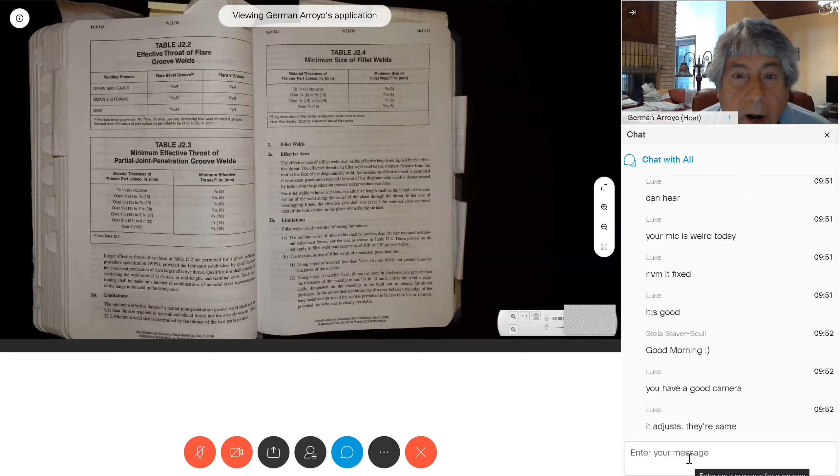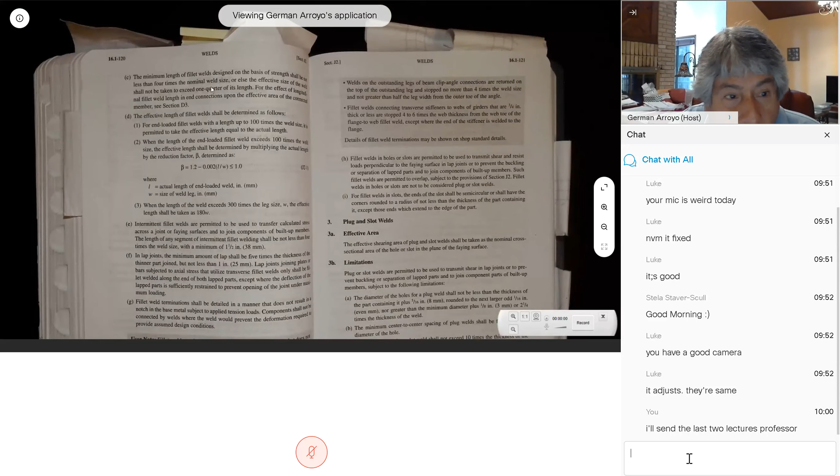I want to take care of business before I continue. Yesterday we were talking about the limitations, and some people after class were still asking me the same question. Don't forget that on page 16.1-119 and 120, we had a limitation. The one we were talking about yesterday, about the minimum length of the weld, is given at the top of page 16.1-120.

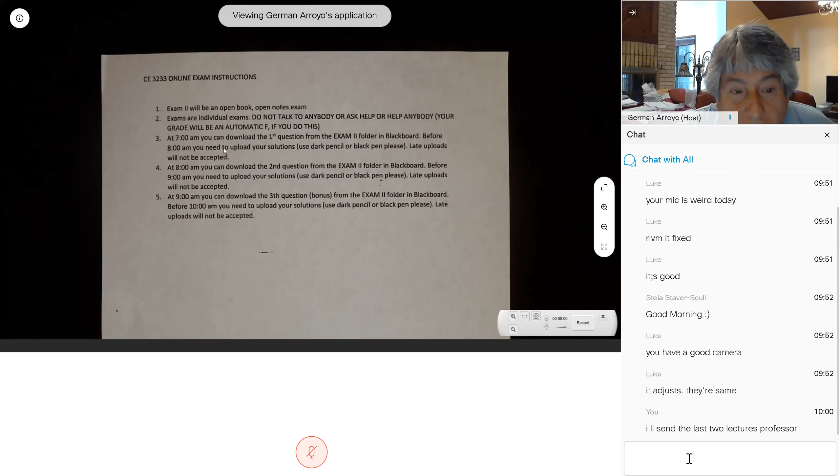Want to remind you, this is important: next week the exam is on Tuesday. We're going to start at 7 o'clock in the morning. Just imagine right now we have 35 people, and just imagine that you're late. So you have to start at 7 o'clock. I know that parking at your house is difficult or whatever, but you need to be there at 7 o'clock, and you have 1 hour to upload your exam.

It's better to get partial credit than not to get any credit at all. So the first problem, by 8 o'clock you have to upload it. The second problem you can download at 8 o'clock, but also on this screen, the second problem will appear for 1 hour, and by 9 o'clock you need to upload it.

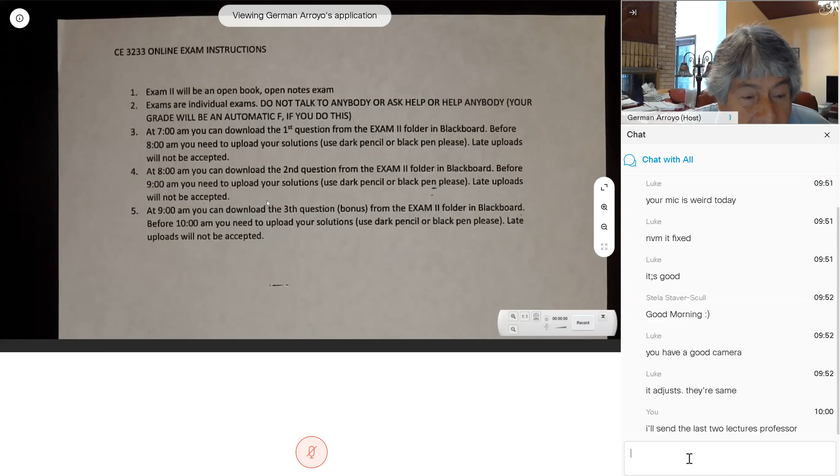So you need to start practicing scanning, but make sure that I can read your exam. The same happens with the bonus. I already put this in Blackboard: the bonus you have from 9 until 10. Make sure you understand that at 10 o'clock no more exam will be accepted. So it's better to get partial credit than no credit at all.

Any question before I start solving problems? Will we get partial credit for the third question?

You're going to be getting partial credit for the first question, partial credit for the second question, and partial credit for the third question. Remember what I told you in the face-to-face lecture, that the only reason why some people go to the next level is because of the partial credit. So definitely you're going to be getting partial credit, but like I said, it's better to get partial credit than no credit at all. Make sure that you upload your exam. These are the rules, very simple rules, so make sure that you follow the rules.

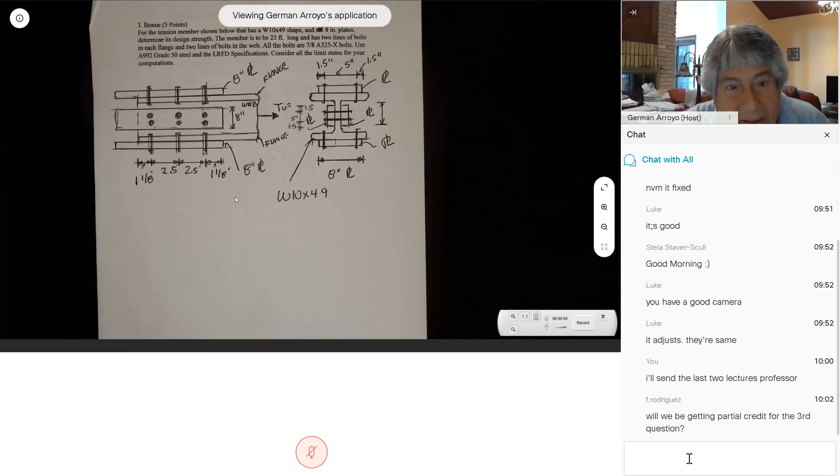You had good memory, this is the same problem that we solved yesterday. This is exactly the same shape, the W10 by 49, and these are exactly the four plates that we had yesterday. The only difference is that instead of being a welded connection, this is a bolted connection. The question here, it is a tension member, so you don't have to worry about determining if it's eccentric shear. It is a tension, and the shape is given.

And there are four plates, two in the web, two in the flange, and they want to find the design strength. Remember, phi T sub n is greater than or equal to T sub u. Also remember it is a 25-footer, so you have to check the K, the L over R.

It says here two lines of bolts in each flange. So when you look at the flanges, this is one line of bolts, this is the other line, and each line has three bolts. So on the top flange, in the top line, there are one and two lines, and each line has three bolts. How many bolts do we have in the top flange? Six. Six on the top flange.

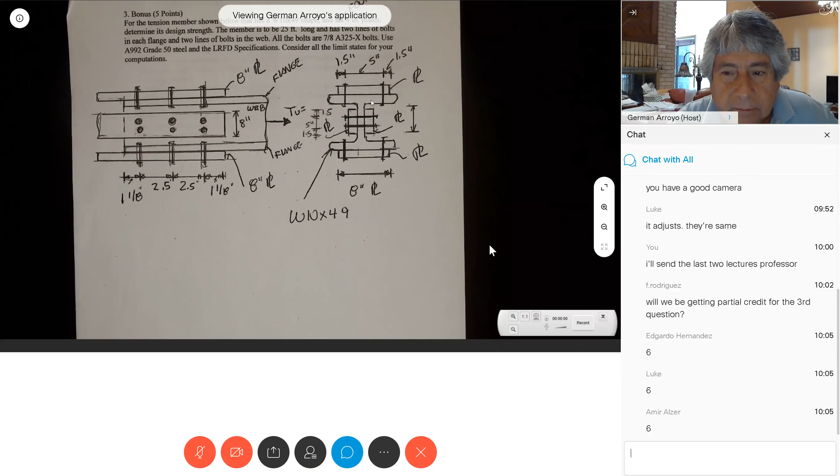The second question for everybody: is this single or double shear? Single shear. Good, so on the top flange and the bottom flange, we have single shear. On the web, we had this is one, two, three bolts, and we had two lines of bolts. So how many bolts do we have in the web?

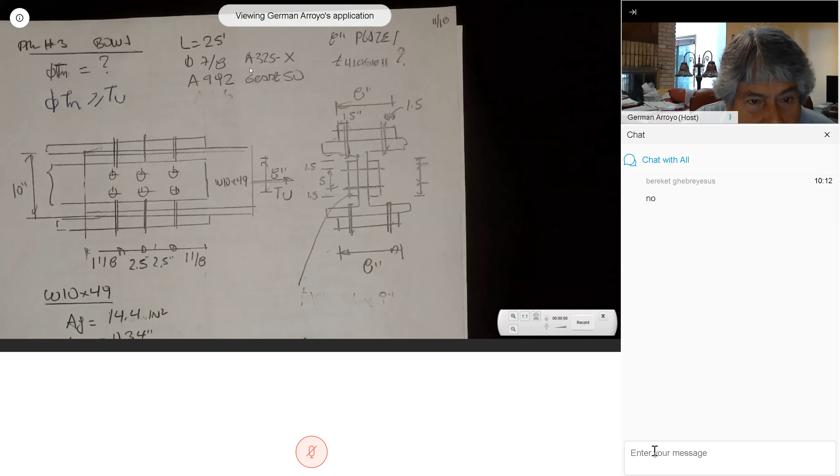The length of the member is 25 feet. The bolt is 7/8 inch, A325X, the material is A992 grade 50, 8 inches. And I put the thickness here to ask you the question already asked.

From chapter 1, the gross area - the same gross area that we used yesterday. The thickness of the web is 0.34, the thickness of the flange is 0.56. For a wide flange, the thickness of the flange is always more than the thickness of the web. The reason is we want a large concentration of area away from the neutral axis, because the moment of inertia is the moment of inertia about its own centroidal axis plus the area times distance squared. So we want a large moment of inertia, that's why we want a large area - that's why the flange thickness for a wide flange is always more than the thickness of the web.

And r_y was 2.5, and the required was L times 12 over 300. For tension, we do not use the K factor. For compression, we use the K factor. So it's okay.

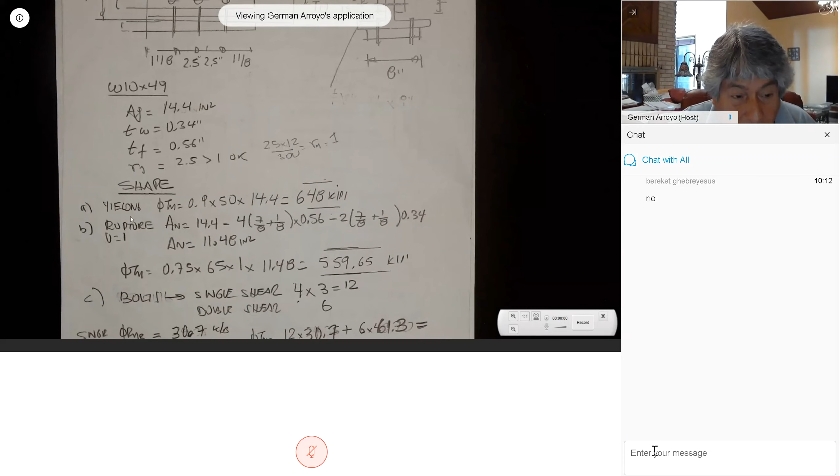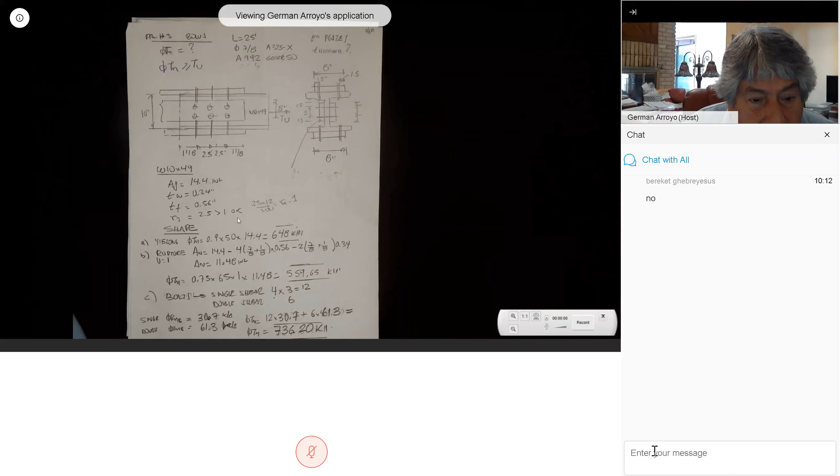Making a point here - I only have information on the shape. Since this is tension, I had to check all the limit states, because the problem says consider all the limit states. Remember, for tension we have tension yielding, tension rupture, bearing, capacity of the bolt in single or double shear, and block shear.

So there are 5 limit states, and I started with the first one: yielding. It's phi times Fy times the gross area - look, the gross area is right here. So if yielding were to control, 648 kips is the design strength of this connection.

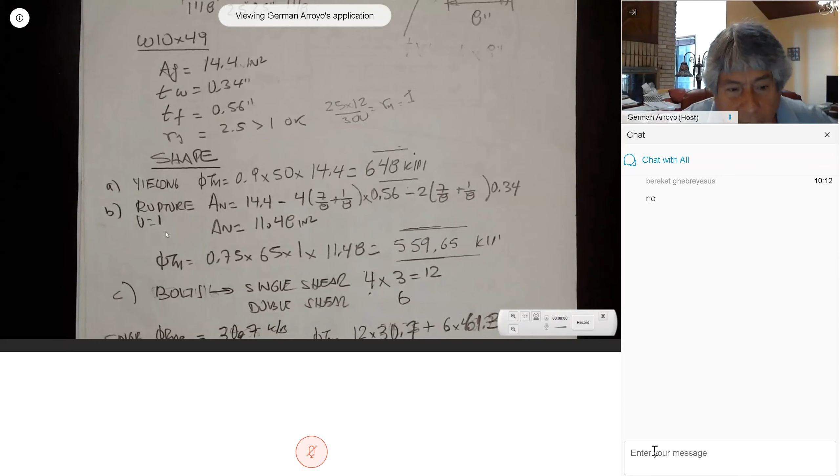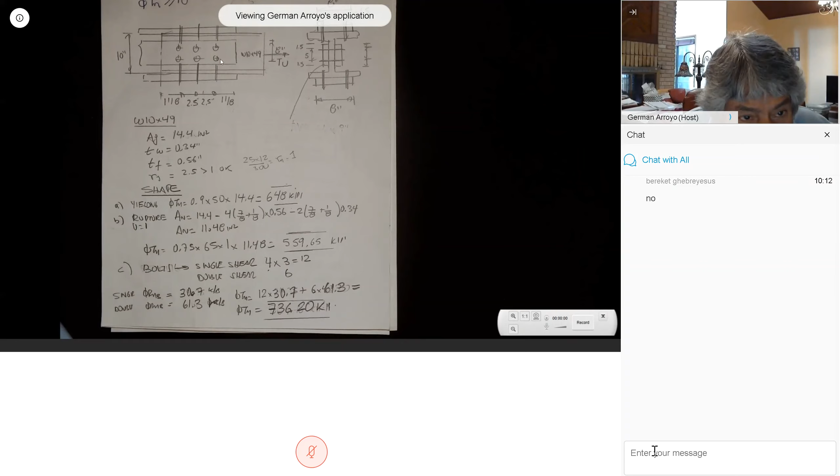Look - whenever we have tension, this is the load. This section is perpendicular to the direction of the load. Look at this section perpendicular to the direction of the load - we have the flanges and the web. So this cross section at this location is this one.

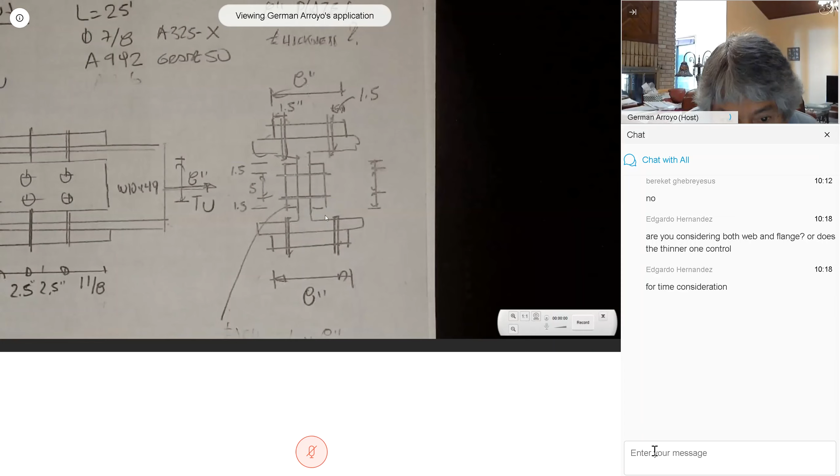Edgardo, look - physically at this location, this is the cross section. So at this location we have four holes in the flange, and this is the thickness of the flange. Whenever we subtract from the total gross area, we're going to subtract the 4 holes that are in the flange. So this is the thickness of the flange, and the thickness of the flange is more than the thickness of the web.

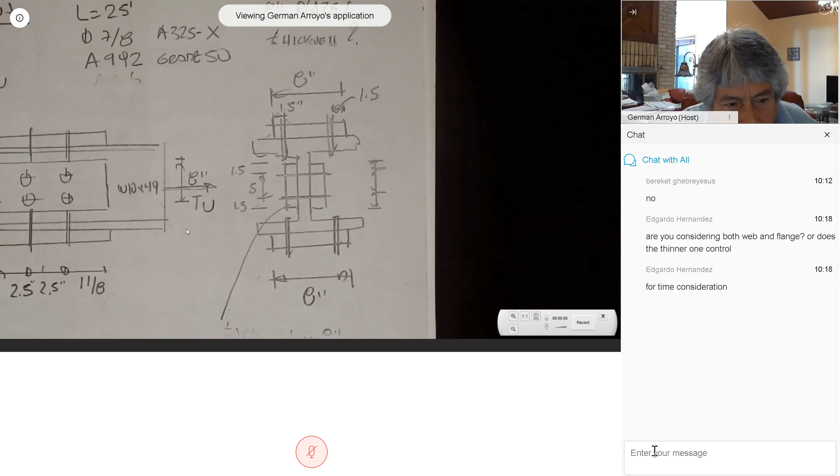Whenever we go to the web, we're going to subtract 2 holes, and this is the thickness of the web. So we do not just use the thinner or the thicker - we consider what is physically there. So at this section we have 4 holes in the flange, 2 in the web. So I'm going to go back to this.

Thickness of the web and the thickness of the flange - so if you look here, gross area 14.4 minus 4 holes in the flange. Diameter of the bolt plus 1/8 inch, 0.56 is the thickness of the flange, minus the 2 holes that are in the web - 2 times the diameter plus 1/8 inch, 0.34 is the thickness of the web. So the net area was 11.48.

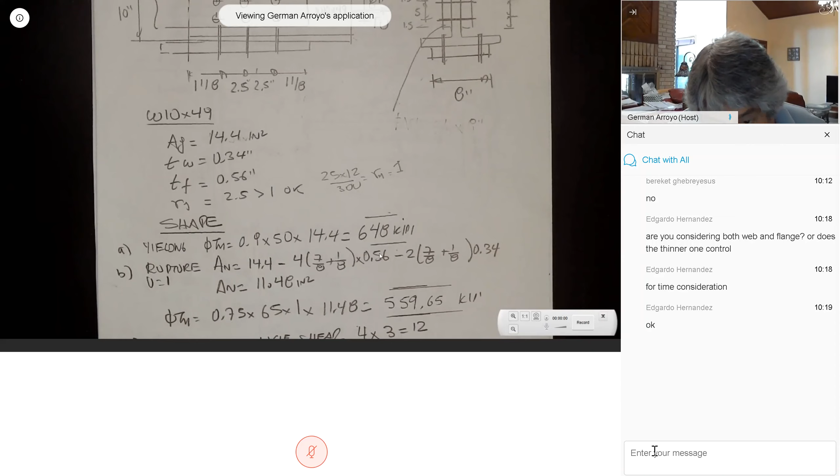Whenever something happens in a class, I don't blame you, I blame me. I understand that probably I didn't cover this correctly, so when I grade, I consider that it's not your fault, it's my fault. But in this case, I'm telling you in detail, if I give you something like this and you make a mistake, it is your fault.

Any question about this? Look, 4 in the flange, 2 in the web. Any question, any clarification? This is like in the class, some of you understand faster than others. So if you still don't understand and don't want to ask right now, ask me later, and I'll turn my computer on and show this to you in detail.

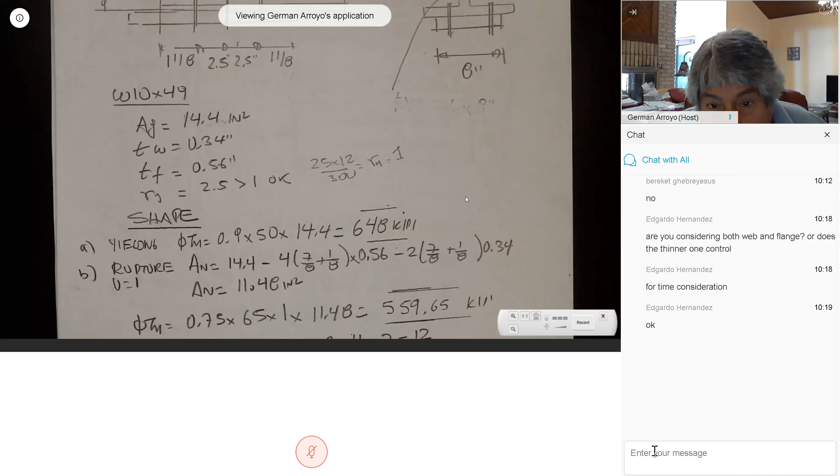The point I want to make is whenever you look at this tension member and this section, when we had 100% of the load like we normally do, we had 4 holes in the flange and only 2 holes in the web. That's why the net area had 4 holes in the flange, 2 holes in the web, 11.48.

So the limit state of rupture, phi times Fu, the reduction factor U is 1 times, so this is the net effective area, 559.65. Right now this is controlling my design because it's smaller than this. So right now what is controlling my design is rupture. The next limit state is the bolts.

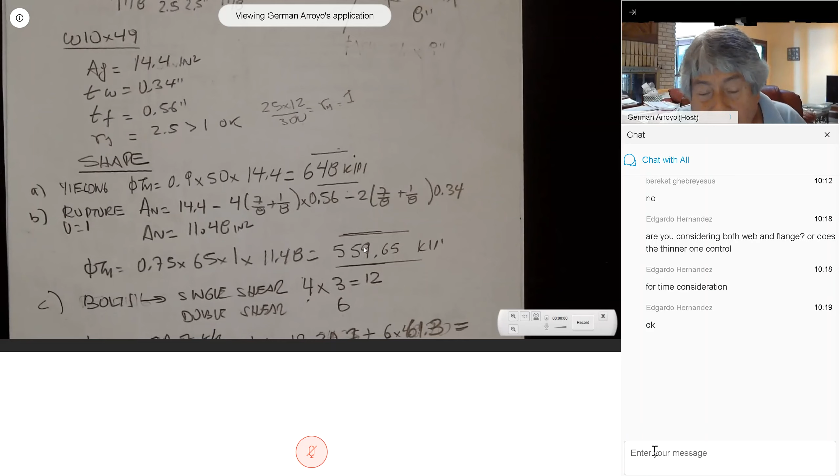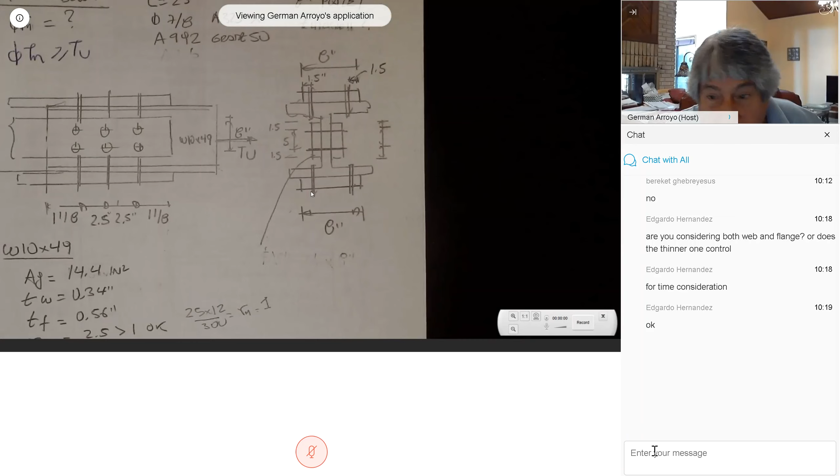I'm going to go back to the top and ask you this question. I don't know what Edgardo means for time consideration, maybe I'll figure that out later. No time consideration. If you're saying that you're going to consider the thinner one, that's the time consideration - that is a mistake, that is a terrible mistake.

So if you consider it here, all of them with 0.34, that is a terrible mistake. Nothing to do with the time, it had to do with understanding of the problem. And I think that's where you...

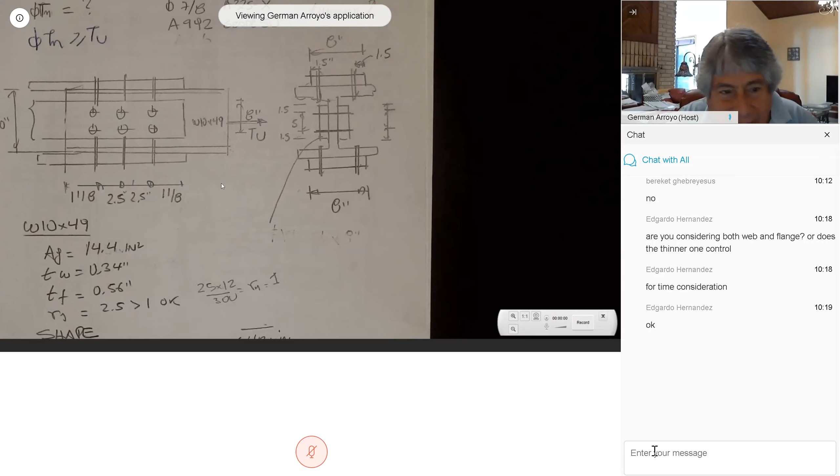Okay, so we're looking at the board right now, and I asked you this question before. You have to be looking at this cross section. Before I ask you, single shear and double shear - whenever we find what is the design strength of the connection based on the bolts, how many bolts do we have in single shear? Anybody? How many bolts are in single shear?

Not for the cross section, for the entire - whenever we find the design strength based on the number of bolts, look, there are two in here, two in here, two in here, so we have 6 and 6, 12 - that is correct. How many bolts do we have in double shear? 3 and 3. Make sure that you look at this because that's the correct answer. Single shear 12, double shear 6 - that's what you told me, and that is the correct answer.

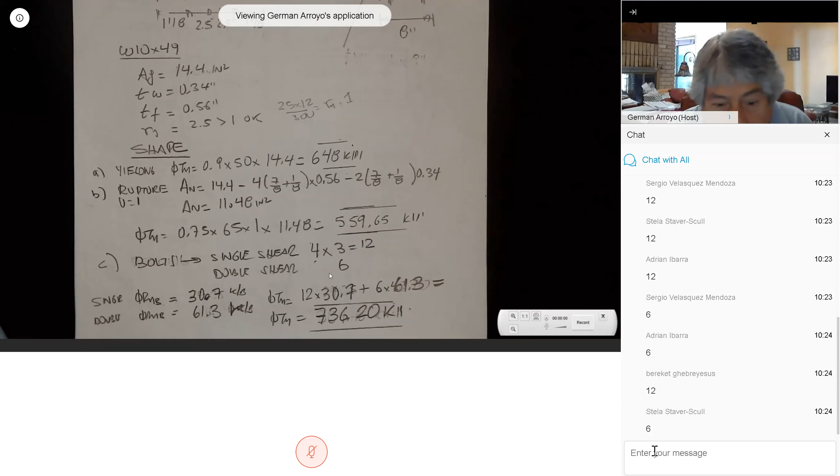Since this is exam number 2, I told you you can go to chapter 7, table 7-1, and I expect you to do that because time is very important. I want to point out something - look, this comes from chapter 7, table 7-1 for single and double shear. What I want to point out is that in previous editions of the code, this value was different. This value has increased, those values have increased.

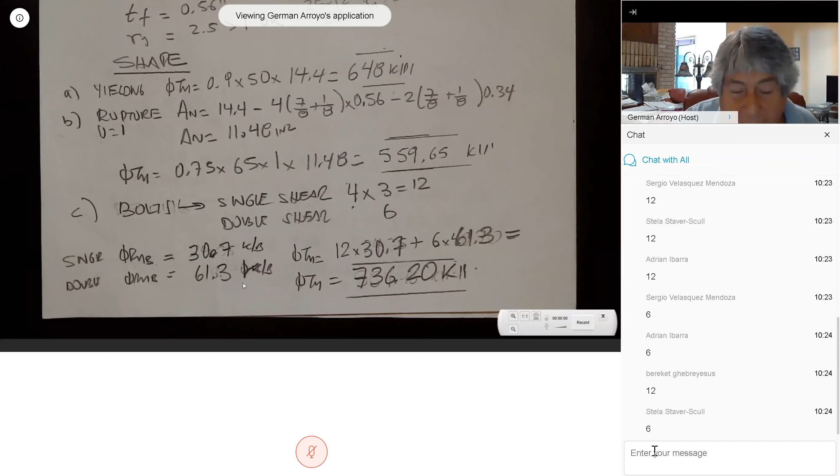So in some old exams - somebody asked me yesterday and I forgot to mention to everybody - it's not that it's wrong, it's that we had different values. Every time they do research and determine there's more strength than we believe, or that it didn't have that much capacity, they revise it and create new numbers. So this comes from 7-1, and these are the new numbers for single double shear. So we had in single shear 12 times 30.7, in double shear 6 times 61.3.

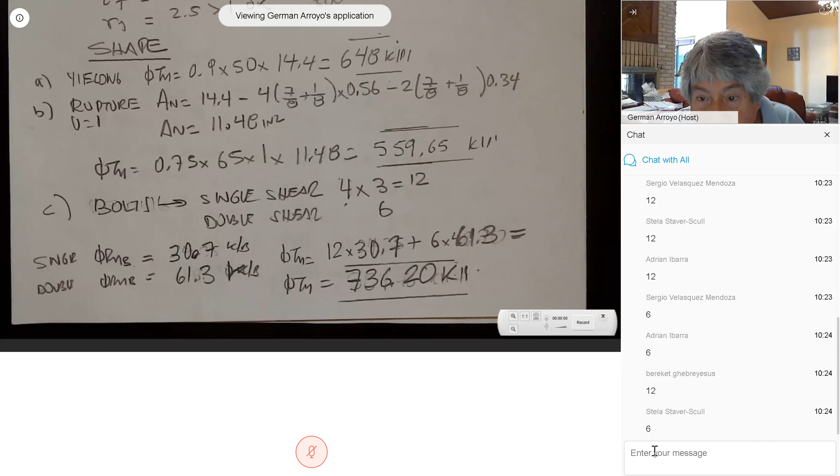So the capacity of this connection based on the number of bolts - I need to move this a little bit - the capacity of this connection based on number of bolts is 736.20. So what is controlling my design right now? What is the design strength if I end the problem here? Rupture. And how many kips is that? 559.

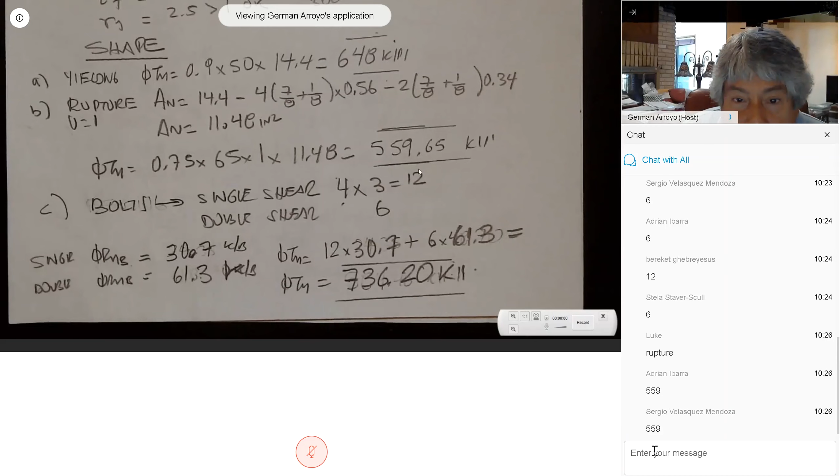So now we need to do either block shear or bearing, and what I did in the next step is bearing. So I'm going to go to the top again and ask you some questions. These dimensions are given, let's look at the top.

Can I do the bearing in the plate? Can I do bearing of this plate? I just want to find out if you're paying attention. Can I do bearing for this plate? No, because we don't know the type of material, we don't know the thickness, so we cannot do it. So I have to do bearing only on this flange.

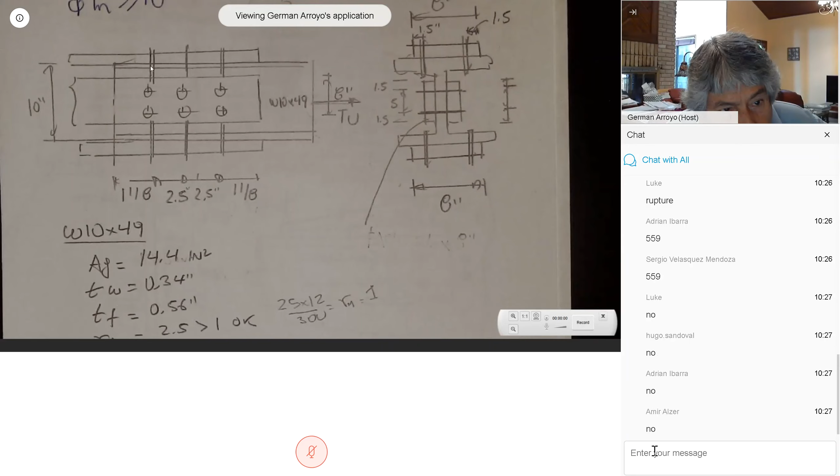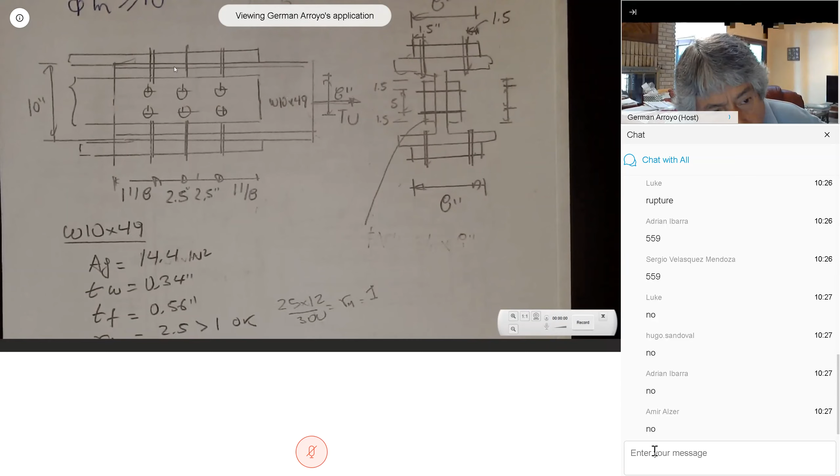So for this flange, this is my external bolt and these are my internal bolts. Look at this beam - when you look at this beam in here, this is the end, this is the end of my girder. So this in here is external, and these are the internal. So I'm going to have to do the Lc exterior and interior for the flanges. In the flanges, considering top and bottom flange, how many exterior bolts do I have for bearing?

Let me tell you, look, this is my cross section. If you go back and look in here, look at this cross section, and imagine that it is one, because all of them are the same. How many bolts do I have here on the top? And how many do I have in the bottom? So altogether, there are 4 still.

What about the interior in the flange? How many do I have interior, top and bottom flange?

Good. Okay, so let's look now at the web. This is the exterior, and this is the interior. In the web, how many exterior bolts do I have? 2. And how many interior?

And the thickness of the flange, as you know, is different than the thickness of the web. So everything that you're telling me right now is given to you, so you do have to be careful.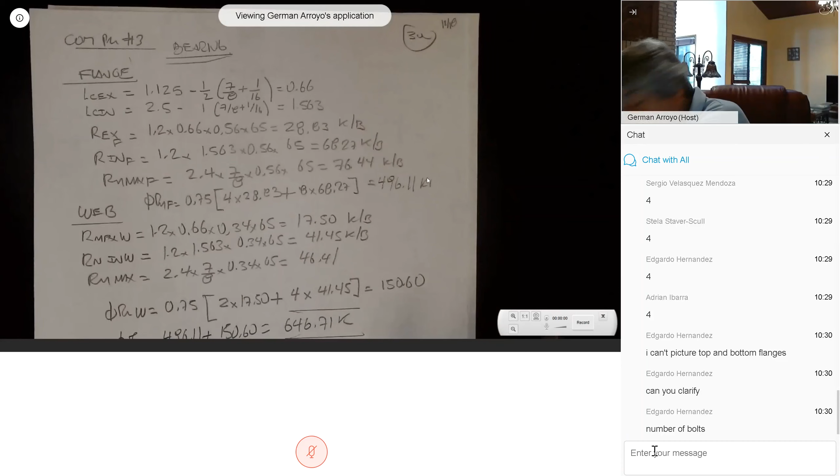So I'm going to go to the next page. I'm going to do the flange. And remember, 1 hour to solve this.

Can you clarify number of bolts? Sure.

Yeah, I know it's difficult, you do need to pay attention. I'm going to repeat this. All that I have is time. I know that you have to go to another class at 11, and you have to drive across the campus, but I had time and nothing to do. I'm bored here at home.

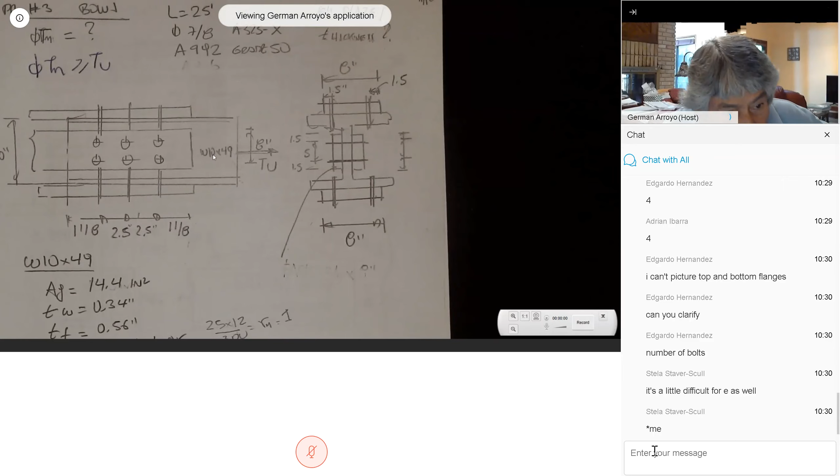So I'm going to tell you again, we're doing bearing. Whenever we do bearing, we have to consider the plate or the shape of both. But in here, there's no information on the plate, so the only thing that we can do is look at the shape, at the type of 10 by 49. And this is the end of my beam, because I'm using the plate to transfer the load to the other side.

Whenever I look at the flange, this is my external bolt, and these are internal bolts. The same here at the bottom, exactly the same. This is my external, those are internal.

So we need to know how many bolts I have at the outside and how many bolts I had inside, because in order to find the bearing strength, we're going to multiply the number of bolts outside or exterior, and we're going to add the capacity of the interior.

So this cross section applies to any location. This cross section is typical cross section. So whenever we look at this cross section, imagine this cross section is in here. And we look at how many bolts we have here at the top. We had 2 bolts. We had here at the bottom, we had also 2 bolts.

So this exterior for bearing, we had 2 plus 2, 4 bolts. Whenever we had what remains is all of this. At each section here, we had 2 at the top, 2 at the bottom, 2 at the top, 2 at the bottom. So if I tell you that exterior for the flanges only, we had 4 bolts. For the flanges only, how many bolts do we have altogether?

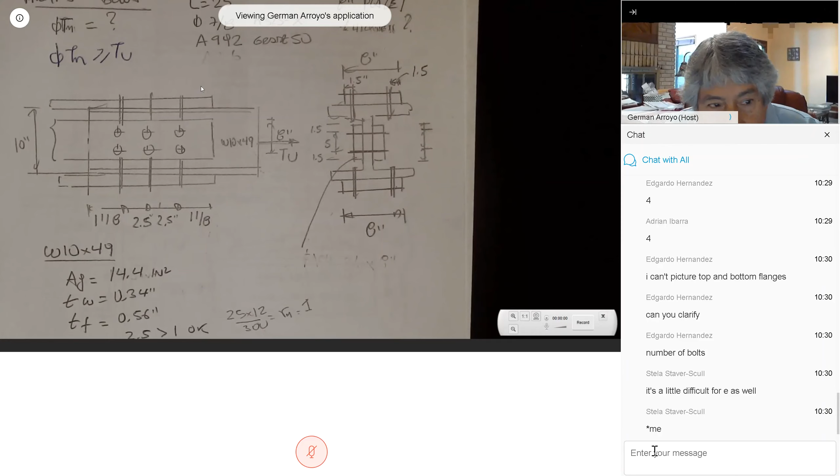No, I'm saying look, here, these are exterior bolts. Exterior bolt, we have 1, 2, 3, 4. Interior bolt.

How many do I have at this section interior? You look at this section. How many do I have interior just for the flange? How many at the top? How many at the bottom? So how many do I have here and how many here? 4. And how many here and how many here? So altogether, how many do I have interior bolt? 8.

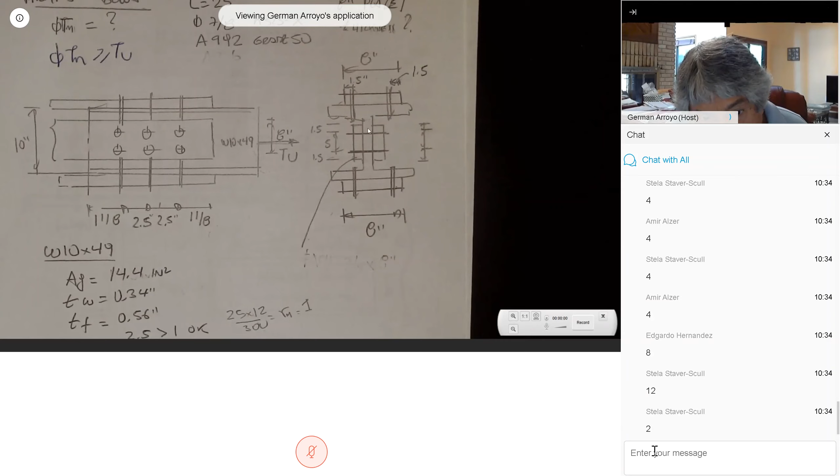Okay, so now we're going to look at the web only. The web is easier to look. These are exterior. How many exterior bolts do I have? And this is the web, this is the cross section for the web. How many do I have in here too? And how many do I have in here? 4. Okay, so that's the way we do it.

I know that is difficult. Just look at this section. This section is the typical. So based on what I think that you all understand.

And this is the geometry that cannot be changed. 1 and 1/8, 1 and 1/8, 2.5, this cannot change. It's like the previous exam where some of you change what was already fixed, what we call typical. This is here my typical cross section.

So what we have in here, flange and web. So I'm going to go to the flange.

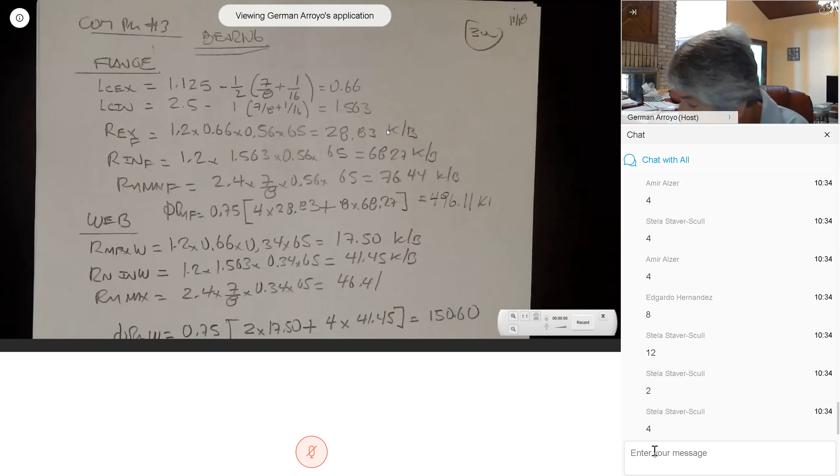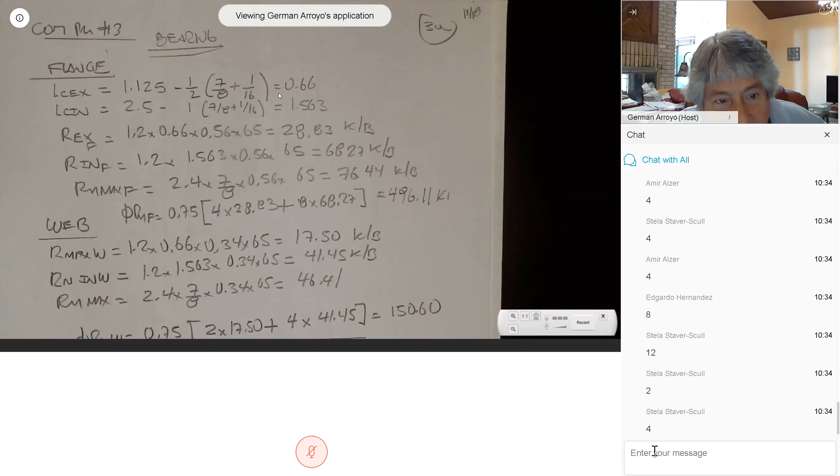So this is a length, 1 and 1/8 minus half a hole. This is the only time we use 1/16. This is 0.66. For the interior...

The distance center to center of the holes is 2.5. We have to subtract 1 hole. That's why we have 2.5 minus 1 hole, and the 1 hole is the diameter of the bolt plus 1/16.

So now, as you remember, this is tearing. And the second equation is the bearing deformation of the hole. In the previous code, we did not have it divided into tearing and deformation of the hole, everything was together. Now what I'm doing here, this is tearing, this is for the exterior, and this is for the interior. This formula is in the code, in the bearing portion. I don't want to offend anybody.

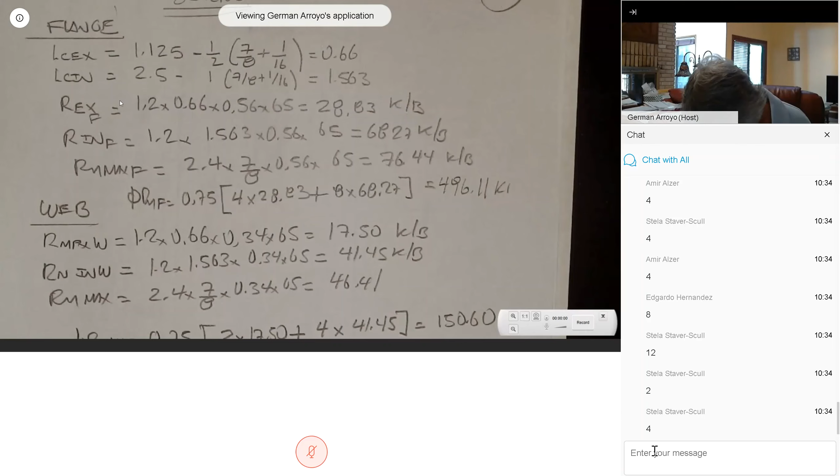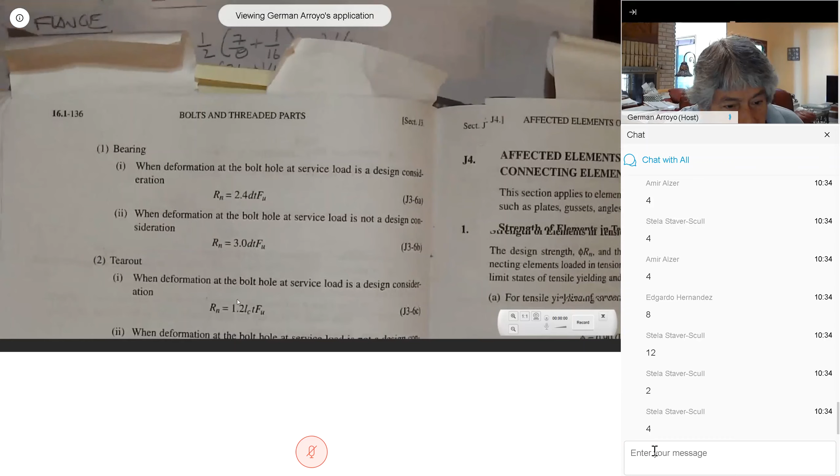But I just want you to refresh your memory because it's been a long time. Bearing deformation of the hole: 2.4 D T Fu. And in here, tear out: 1.2 Lc T Fu. So these are the equations I'm using here.

1.2, 0.66. What is this? 0.56? Times 65. I'm going to go back to the page.

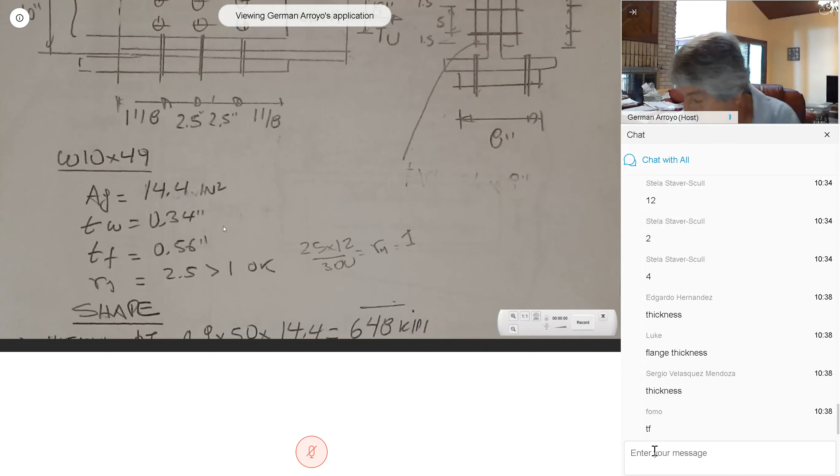The thickness of the flange and the thickness of the web. I hope you're not getting dizzy with me doing this and going back. So since I'm doing the flange, this is the thickness of the flange. This thing here is Fu.

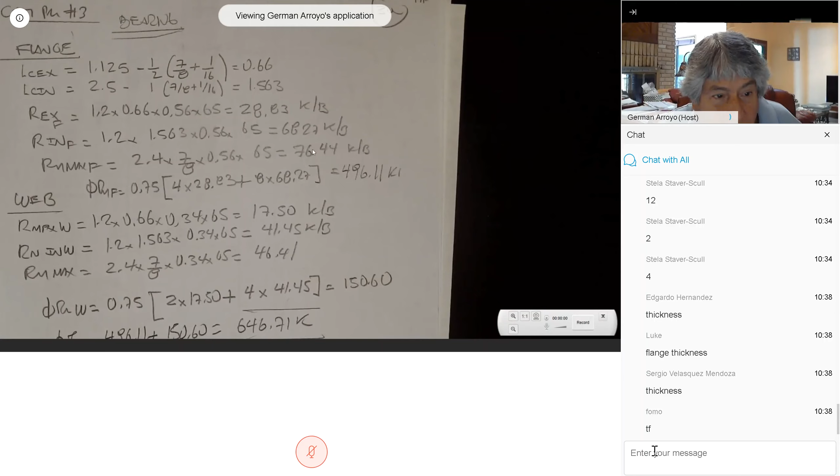So 6827 for the exterior, 3644 for the... 2883 for the exterior, 6827 for the interior, and the deformation of the hole, 2.4, the diameter of the bolt, the thickness of the flange times 7644.

We always compare the numbers. This had to be smaller than this number. This had to be smaller than this number. So in here, I'm finding the capacity based only on the flanges.

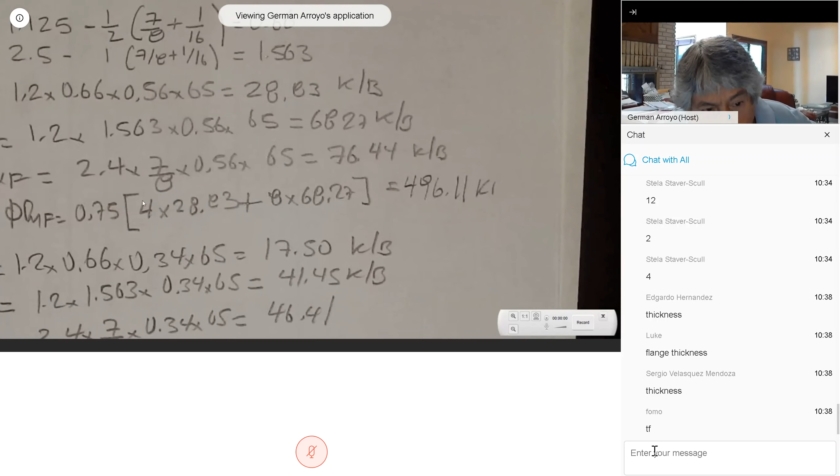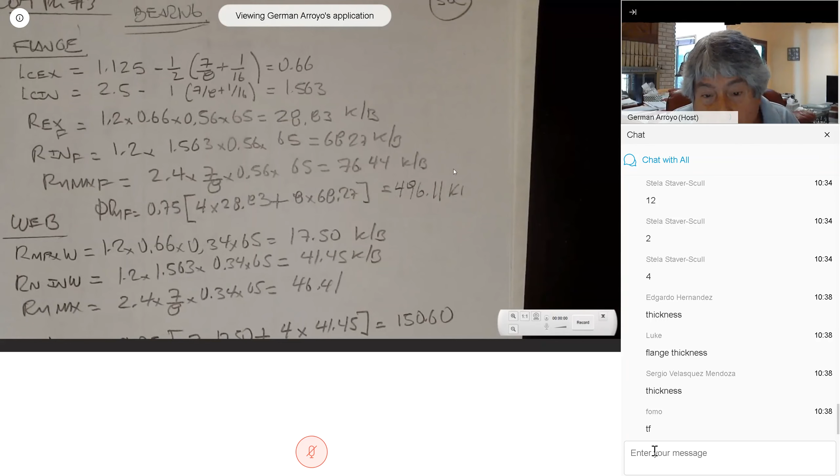The flanges: 4 exterior bolts that you told me at 2883, 4 exterior holes, 2883 times 4, 8 interior at 6827 because it is smaller. So right now, the flange alone, based on bearing, had a capacity of 496.11 K. Any question before I continue?

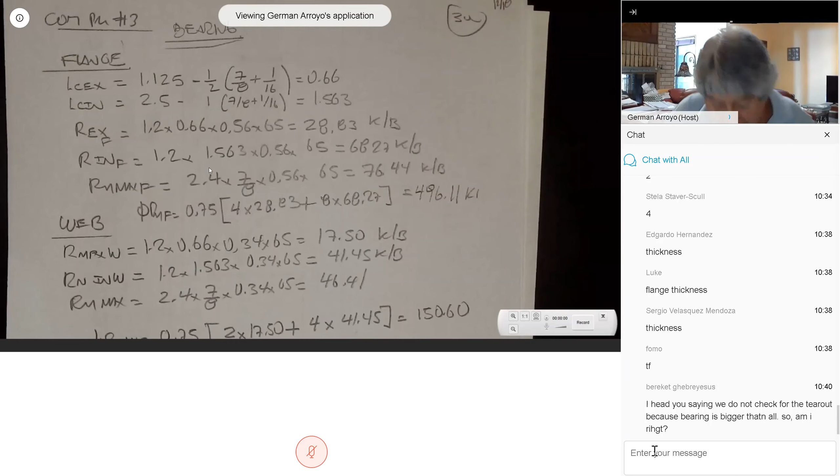You say we do not check for the tearout because bearing is bigger? No, what I'm saying is that the code always requires this in here. This equation, 1.2, this is tearout. And this in here, the deformation of the hole. I think you need to hear better, or maybe I need to be clearer in what I'm saying, is that the code - and it's not me, it's the code - look, bearing and tearout, bearing you have to check.

Oh, it was a spring break. No, you're drinking too much or something. No, I did not say that.

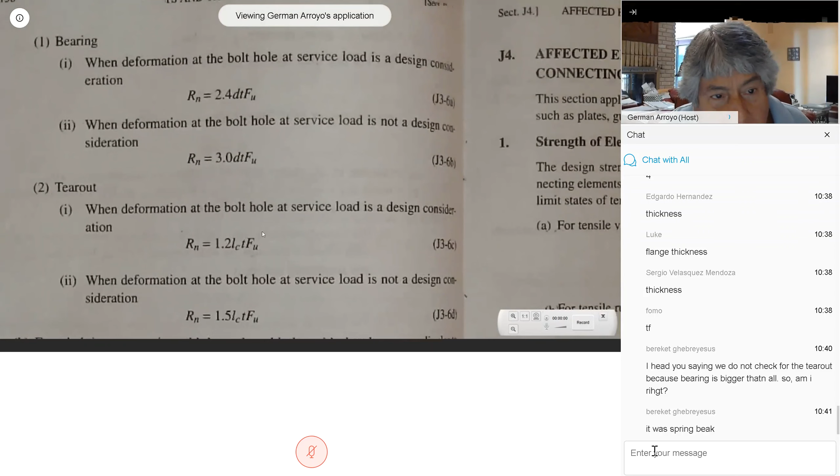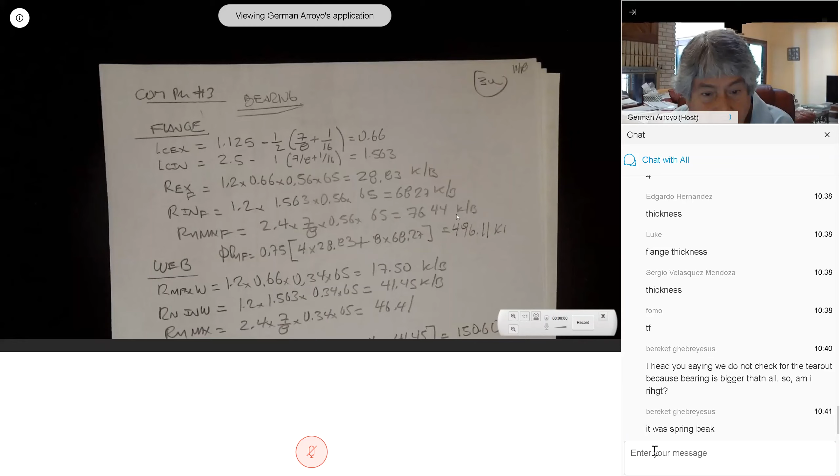Look, always the deformation of the hole, 2.4 D T Fu, is the maximum value. So you have to compare the tearout value with that value, nothing can be larger than this value. So we always had to do tearout, and we had to do the deformation of the hole. It happens in here that for the exterior it's smaller, for the interior it's smaller, that's why we're using those values. But nothing can be larger than this value. So based on the flange, bearing on the flange, we have 496.11. Any other question?

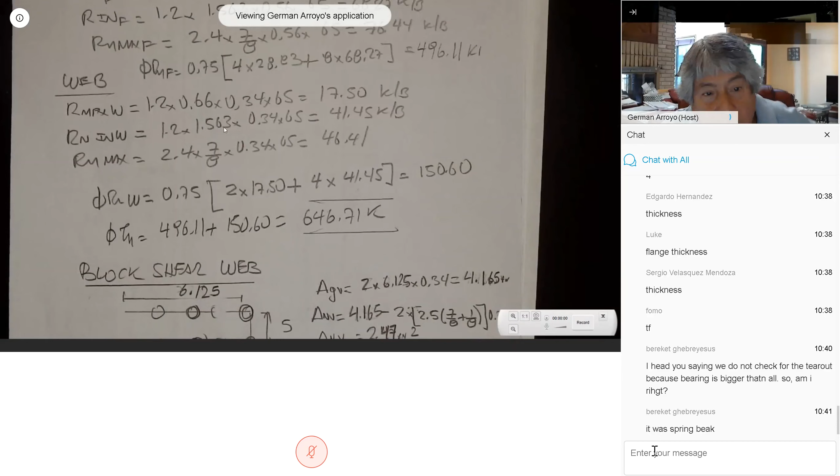So now I need to do bearing in the web. And that's why in here I call it the web. It happens that L to C exterior and L to C interior are the same for the flanges and the web, so this value 0.66 and 1.563 are the same as before. The only thing that changes is value 0.34. What is this 0.34? Thickness of the web.

So based on this computation, tearing is 17.50 for the exterior and 41.4 for the interior. Deformation of the hole, using 0.34, gives 46.41. So if we compare 17.5 with 46.41, this controls. 41.45 with this, still controls.

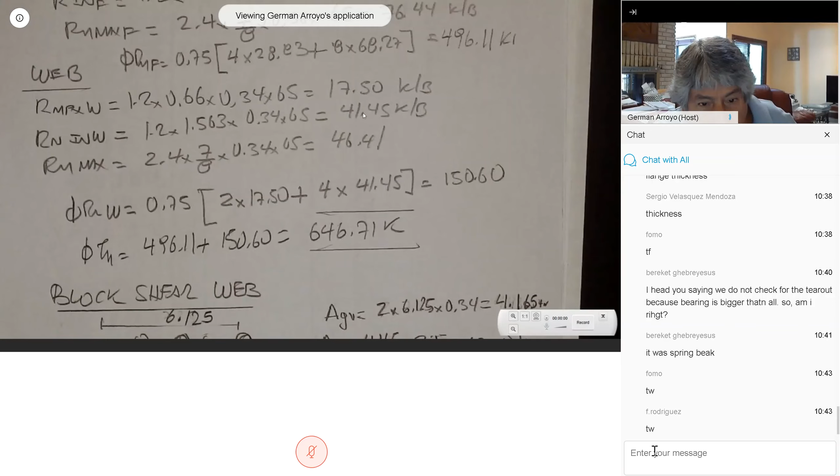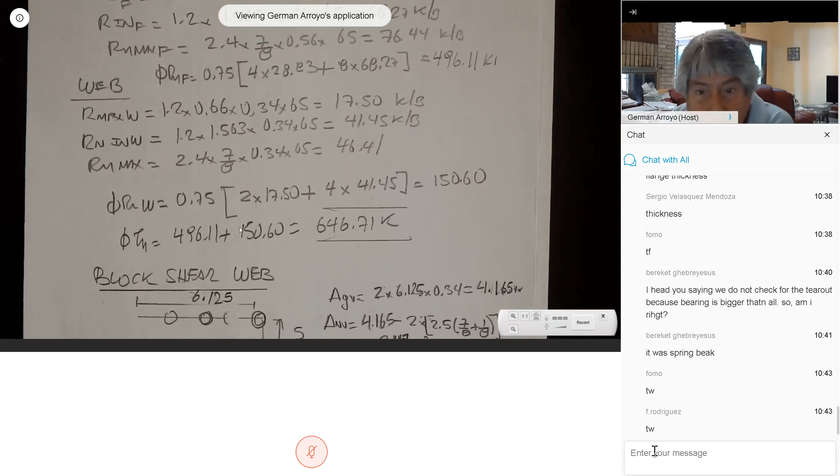So in here, I did phi times 2 exterior plus 4 interior. 2 exterior, 4 interior. And this is what I've done in here: 2 exterior, 4 interior, gives me 150.60 only. And adding, look at this value in here, the value of the flanges and the value of the web, I add them in here.

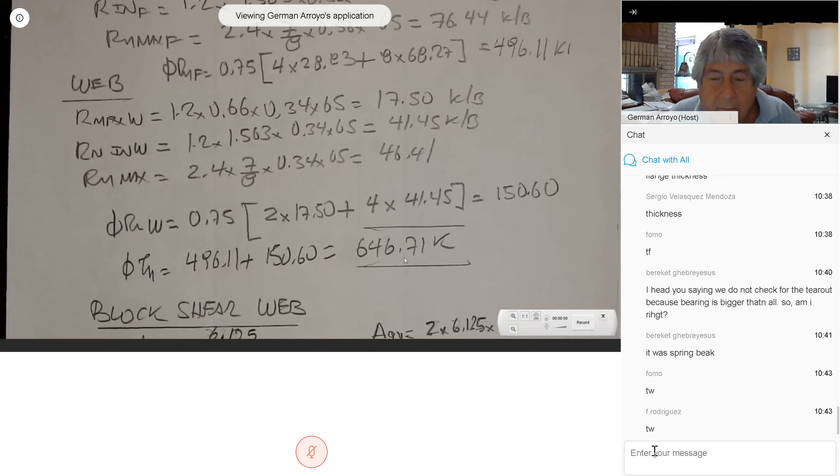So based on bearing, 646.71. What is controlling my design so far? We had yielding, rupture of bolt, and bearing, rupture of steel. So the last step is to do the block shear.

And for the block shear, the web - look, like we did yesterday - this portion in here is connected to the web. So the only thing that's going to have is going to be also a double L. And this distance in here has to be determined.

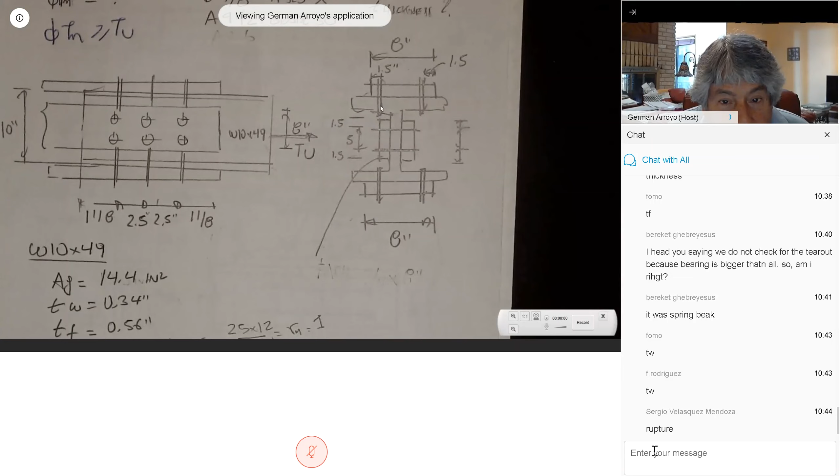This distance has to be... what is the flange? What is in here? The width of the flange.

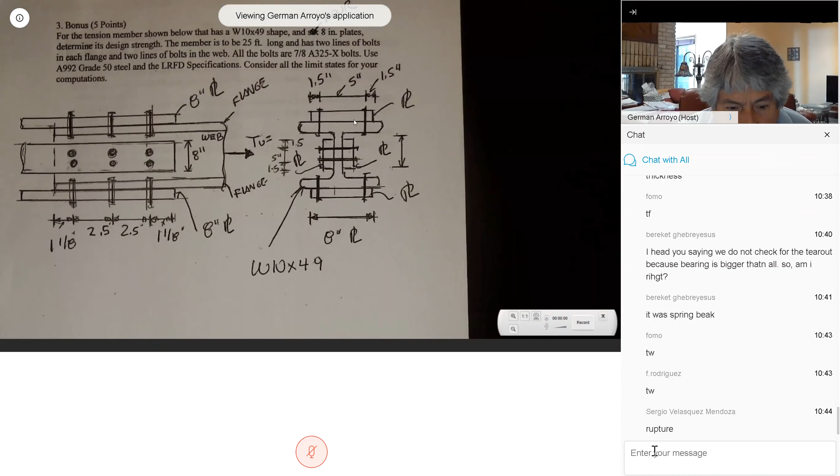Go to chapter 1, from yesterday. Go to chapter 1 for this section. This section is a W10 by 49. So what is the width of the flange? Go to chapter 1, W10 by 49, what is the width?

BF. How many inches? 10? Okay, so if this is 10, right? And look at this in here.

This is 1.5, and I need this dimension from here to here. This dimension. I need this dimension. Stela, look, this in here is 10. Yeah, good, stop, you got it.

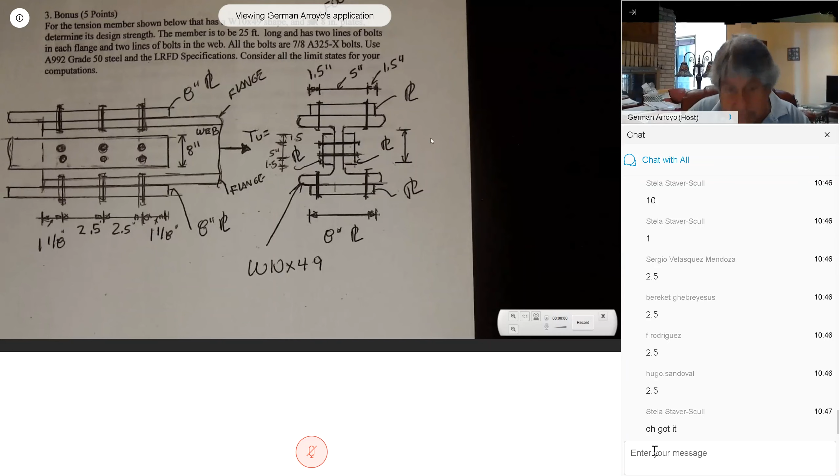So it's going to be 10 minus 5 is 5. 10 minus 5 divided by 2. So this distance, like everybody got it, 2.5. All right.

And for the flange, the length is going to be from here all the way to the end. This is going to be for the double L. This is the width and this is the width. The length goes from this bolt all the way. So what is this distance from here to the end of the flange?

From here to the end of the flange, what is this distance? Exactly, so it's 5 plus 1.125, 6.125.

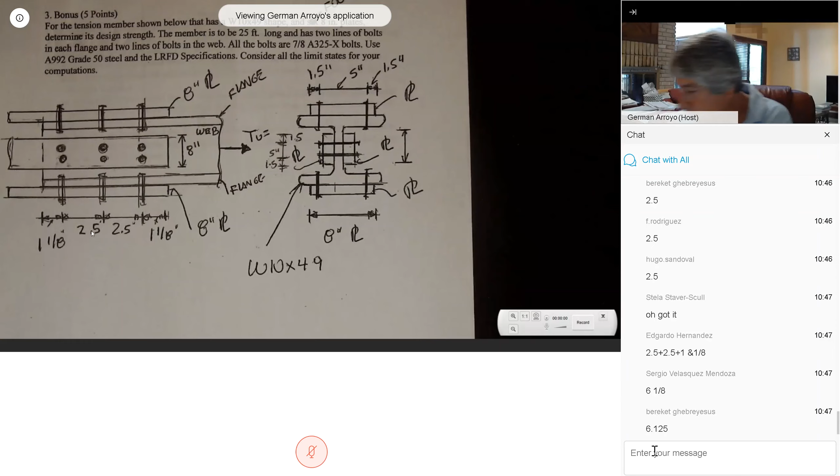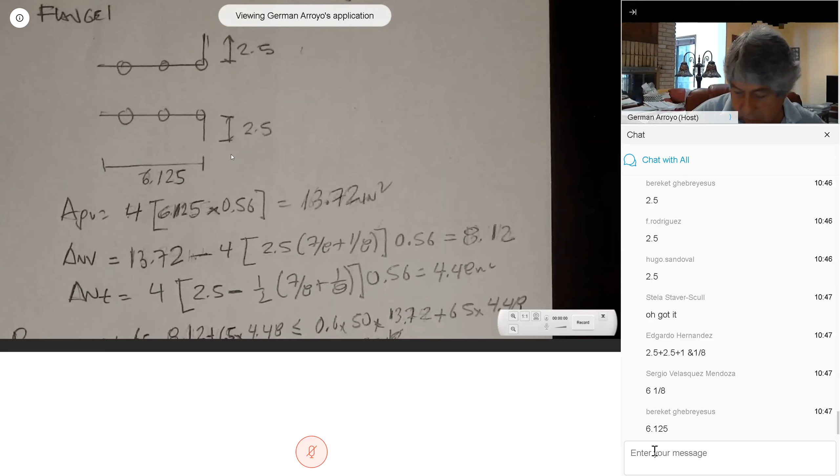So this is what I have in here. The 2.5 that you gave me, 6.125, is a double L. So just to show you, like yesterday, this is a double L.

So the gross area in shear is 1, 2... why do I have a 4 in there? Yes, Adrian, we always measure from the center of the hole. Remember, from the center of the hole. So look, the bottom line. So I had 2 of this on the top and 2 on the bottom, so 4.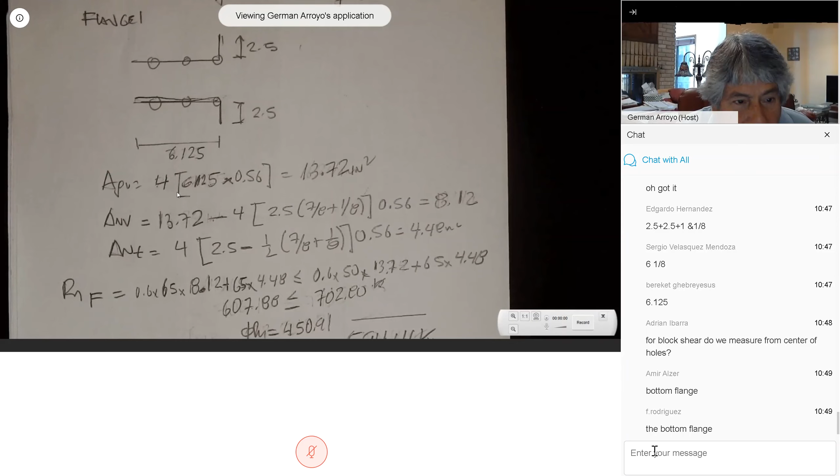So the gross area in shear is 4 times this distance. What is this 0.56 that you told me before? The thickness of what? What is this? Thickness of flange. So I have 13.72.

The net area in shear, I'm saying the gross area 13.7 minus 4 lines, 2 at the top, 2 at the bottom. Look, 1 hole, 2 holes, 50% of the hole is clear in here. 1 hole, 2 holes, 50% of the hole.

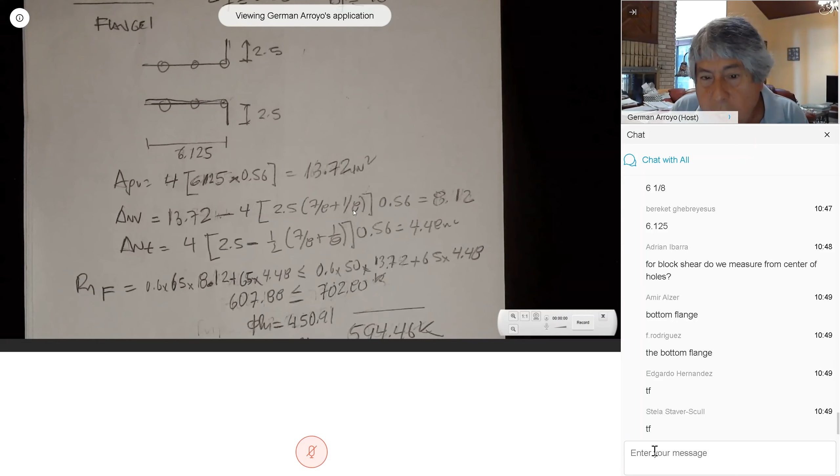So I have 4 lines, 2.5, 7/8 plus 1/8. We always consider the 1/8. The only time that we consider 1/16 is when we are doing bearing. Times the thickness, because an area, thickness of the flange, 8.12.

The net area in tension, we had 1, 2, and 2 at the bottom, 4. This dimension is 2.5. From here to the end, 2.5.

2.5 minus, I had to subtract half a hole, 7/8 plus 1/8. So times 0.56, 4.48. So I'm doing it here.

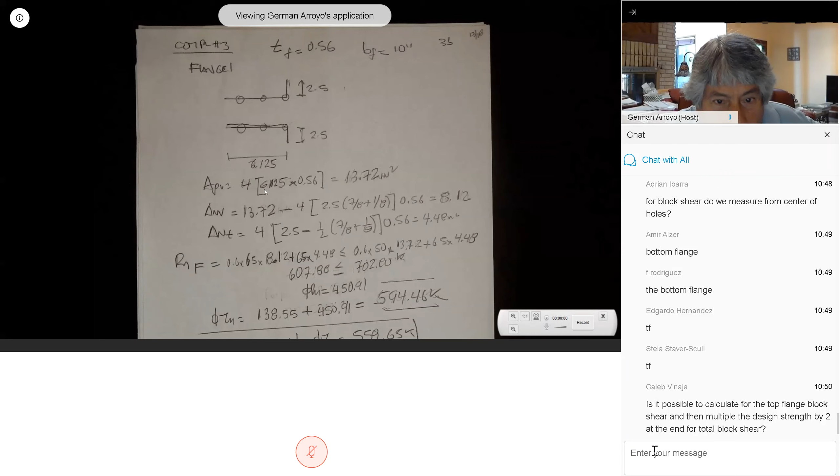This is the formula that we use for block shear: 0.6 FU net area in shear plus FU times the net area in tension, is less than or equal to 0.6 FY gross area in shear plus FU net area in tension. So 450.91.

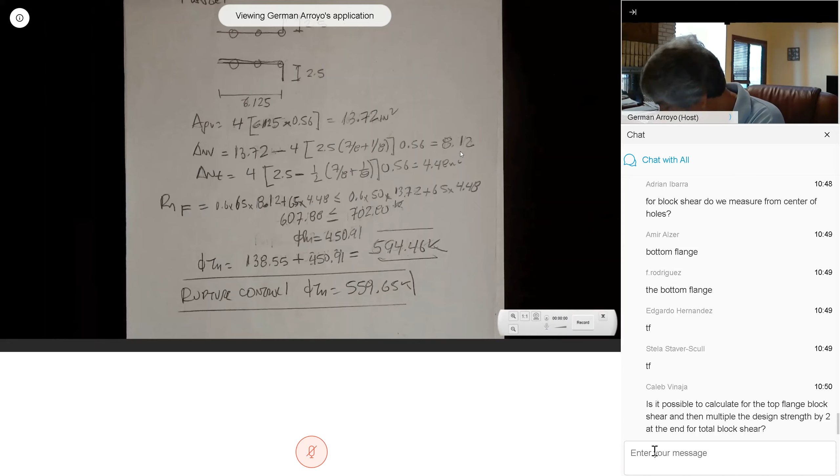450.91. Now I need to compute the web. And when we look at the web, is going to be a U.

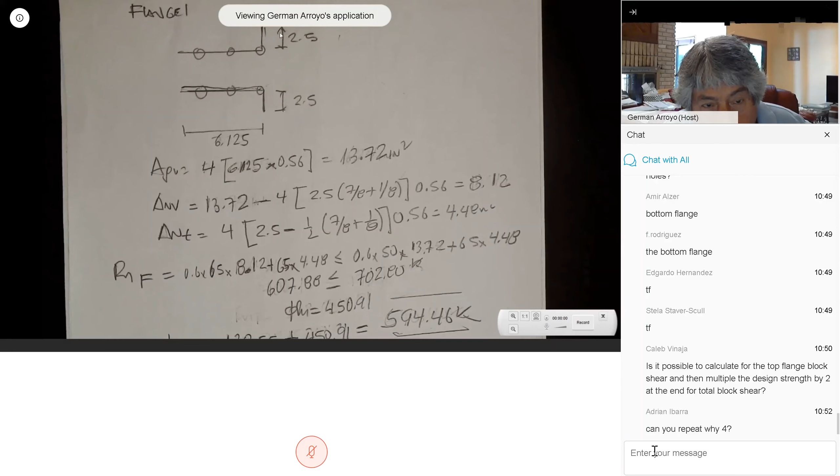Can you repeat, why 4? Yes. We had 2.5 at the top flange, twice, two of this, and there are two more at the bottom flange. So 4 times this dimension, 4 times this dimension minus half a hole.

That's the count of 4. Adrian, do you get it? Very well. So look, so what happened here?

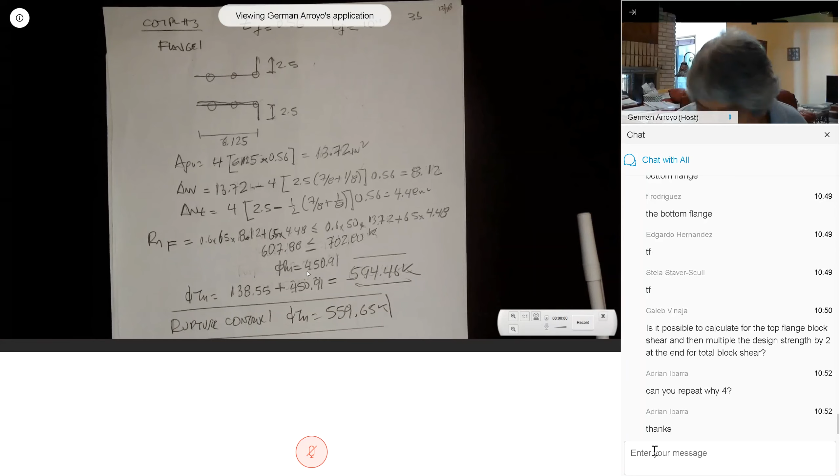450.91 for the flanges. I need to do the web. So for the web is going to have a shape that is a U. Here, here, and from here.

So I want you to look at this. This is the same dimension that we had before, 2.5, 2.5, and this is 1 and 1/8, so 6.125. This dimension here is given as 5.

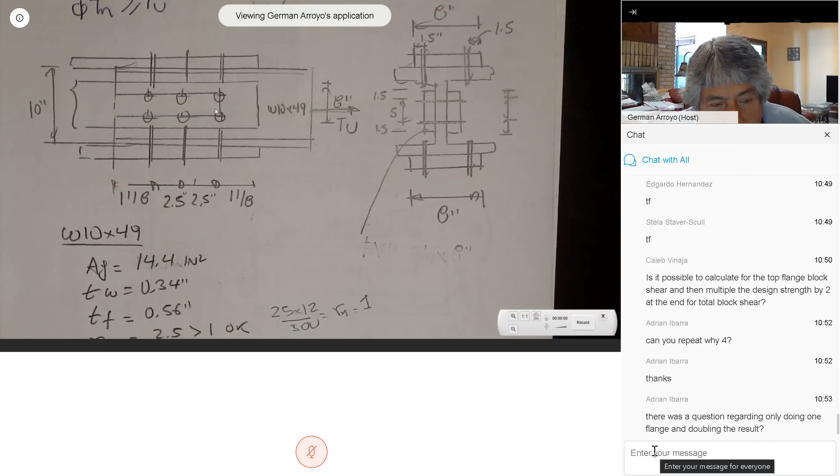So go ahead and compute the block shear for the web. Go ahead and compute it and bring it to me on Monday because we ran out of time.

I know that you have to drive to your next class and you're running late, so you're only doing one flange and done. Yes, you can always do one flange, and it's like 6 plus 6 is 12, right? Or 4 and 4 and 4 is 12. It's the same, as long as you consider all of them, this is exactly the same.